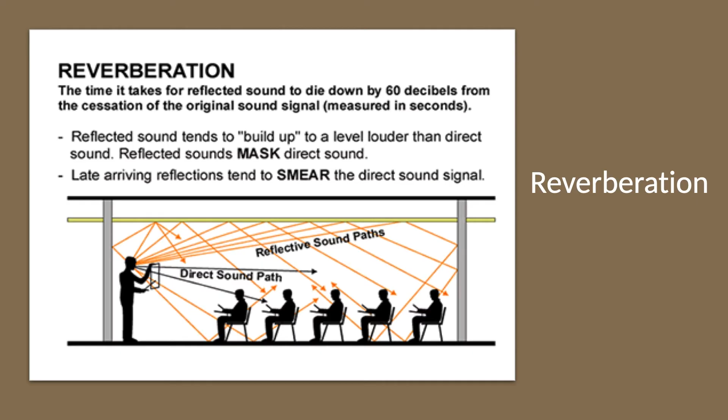Reverberation is the time it takes for reflected sound to die by 60 decibels from the original sound signal. Reflected sound builds up louder than the direct sound and makes it harder to hear. The maximum allowable reverberation time for classrooms is 0.60 seconds.

Ambience or background noise is the totality of all sounds within a room when the room is unoccupied. The lower the ambient noise, the easier it will be to hear the teacher. The maximum allowable background noise for classrooms is separated into 2 parts. The first is noise from exterior sources like highways. The second from interior noises like HVAC equipment and student interactions.

The maximum allowable background noise is 35 decibels for spaces under 20,000 cubic feet. This standard was set by ANSI.

Signal-to-noise ratio is the sound level at the listener's ear above the background noise level. For example, students' main focus is on a signal, the teacher, but during transmission, it gets affected by noise, likely student interactions. This measurement is used to compare the level of sound attributed to the signal to the level of the background noise. The desired outcome is to ensure that the signal of interest, the teacher's voice, is louder than the background noise, pupils in the classroom.

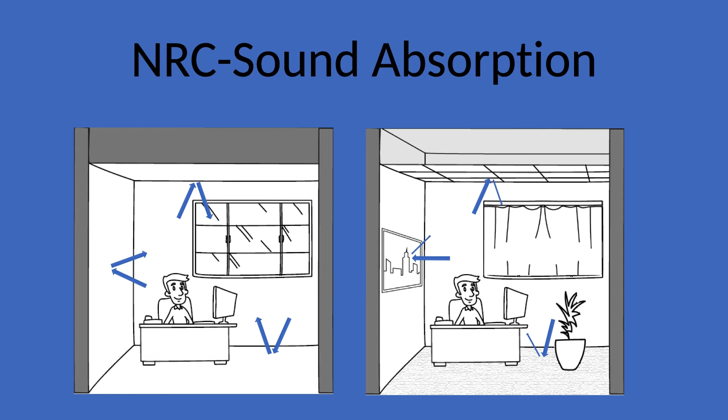NRC is a single-rated system. A material with an NRC of 0 theoretically means that it completely reflects sound. A material with an NRC of 1 will theoretically absorb all sound. An acoustical NRC rating is at least 0.50.

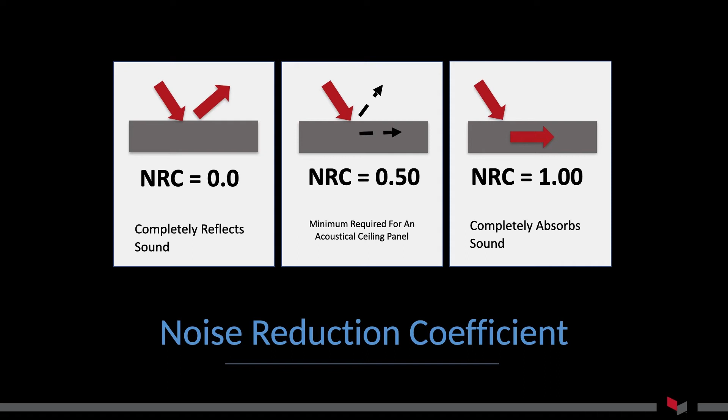What is STC? Sound transmission class is a rating of how well a building's partition blocks airborne sound. Transmission loss is a measurement of the decibel difference on either side of a wall. Let's say we have a 100 decibel tone on one side of the wall, pretty loud. We measure this same tone on the other side of the wall, and we have 55 decibels. So we would say that we have 45 decibel transmission loss.

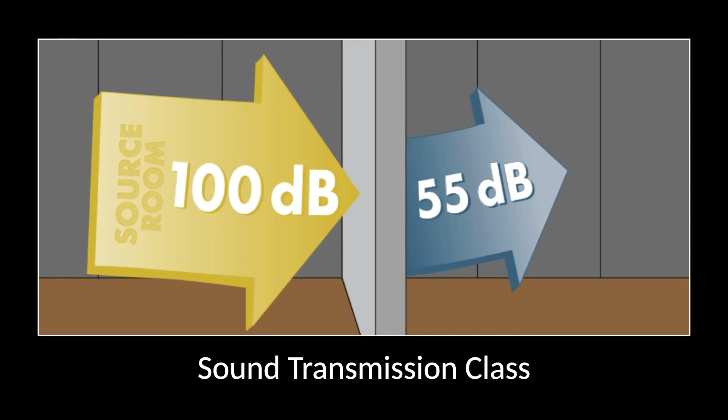Years ago, the walls in our schools were built with concrete block, so sound transfer was not an issue. Today, school walls are constructed with metal studs and drywall. ANSI has set the minimum STC of a wall separating two spaces at 50. Here you can see what can be heard with that 50 specification. Loud sounds are faintly heard.

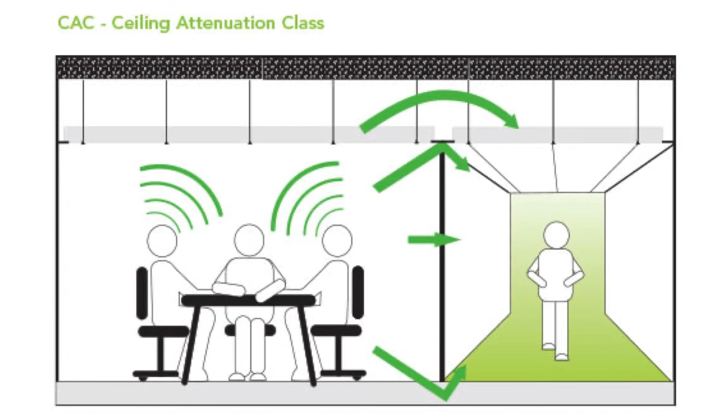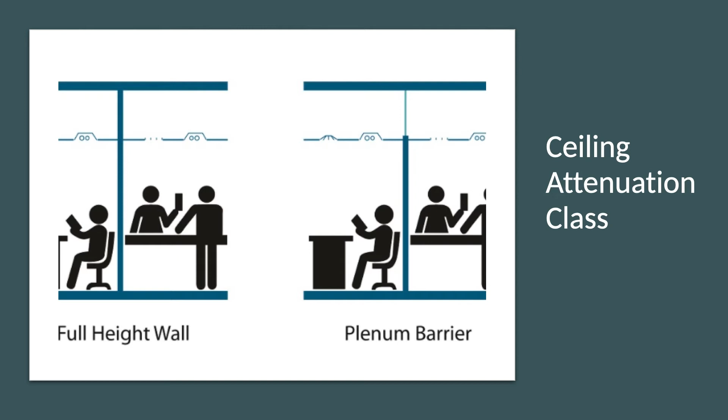CAC, Ceiling Attenuation Class. This test examines a material's ability to block sound. Many walls stop at the suspended ceiling rather than extending to the deck of the floor above. As a result, noise from the adjacent space can move through the ceiling to the adjoining room. To reduce this type of noise, acoustical ceiling tiles will address this situation. High CAC values indicate higher levels of sound insulation between rooms. An acoustical CAC rating is at least 35.

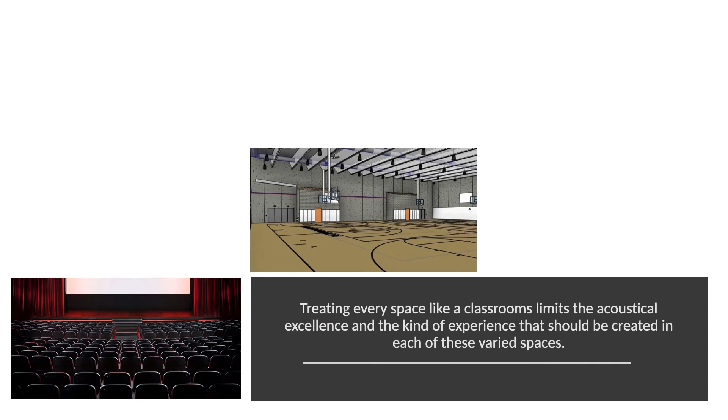School acoustics usually brings to mind the ability or inability of students to understand their teachers inside the classroom. While this is important, schools have a variety of space types and desired acoustical experiences. In addition to the classroom, schools have gyms, auditoriums, cafeterias, media centers, offices, broadcast studios, industrial shops, weight rooms, and band rooms. The list is long. Treating every space like a classroom limits the acoustical excellence and the kind of experience that should be created in each of these varied spaces.

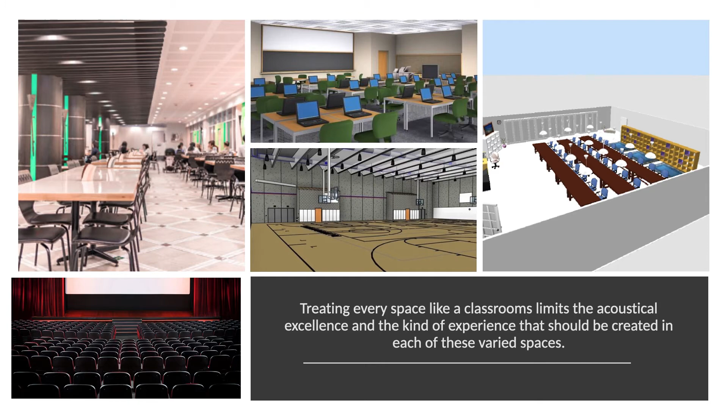There is an intimate relationship between room size, room shape, finishes, acoustics, and core function. An advisable approach is to use the acoustical purpose of a room to drive its aesthetic design. The alternative is to ignore these relationships and then struggle to address acoustics without negatively impacting the visual design intent. The former approach tends to result in a more fluid and linear design process and ultimately a highly successful experience inside the room. The latter tends to result in multiple design iterations, sacrifices, and compromised acoustics. The primary function of the room can be described in three categories: speech, comfort, and music.

Thousands of students on any given day are unable to understand 25 to 30% of what is said in their classroom. Why is that? Excessive noise and reverberation. In the typical classroom, noise levels average about 65 decibels, a threshold for serious health damage with long-term exposure. For students, that leads to lower academic performance, and for teachers, it leads to a loss of voice, having to talk louder to be heard. The health implications are a higher risk of heart attack.

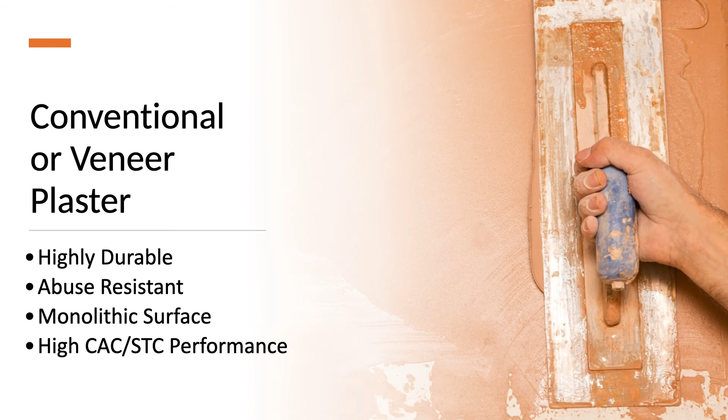Conventional plaster is highly durable and abuse resistant, a monolithic surface, high CAC and STC performance. Drywall: high CAC, low NRC, naturally fire resistant, sustainable, and there are abuse and impact resistant options.

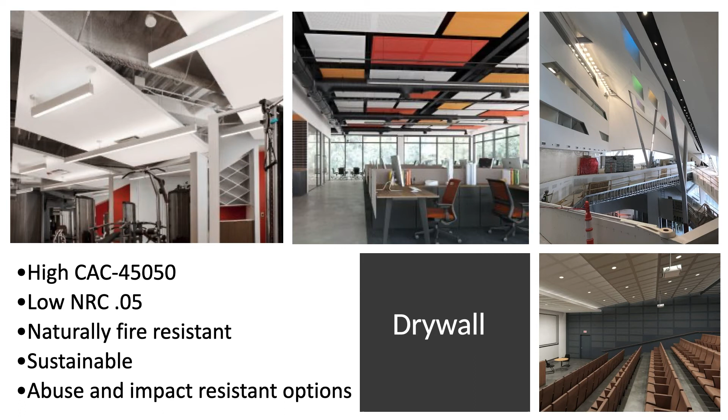Monolithic acoustical drywall: high NRC and CAC, aesthetics with no exposed grid, unlimited shapes and sizes, similar installation as drywall, economical sound control.

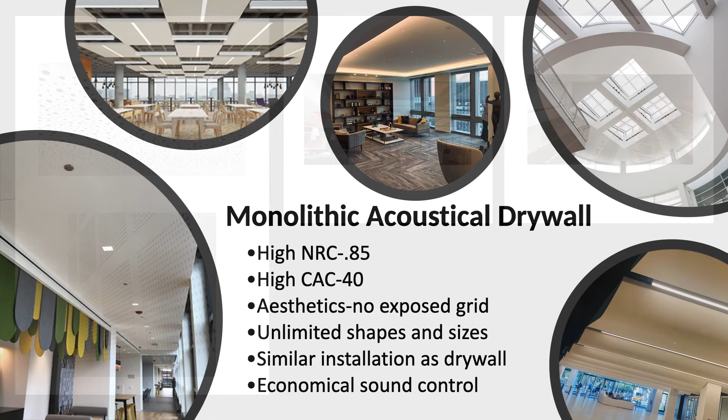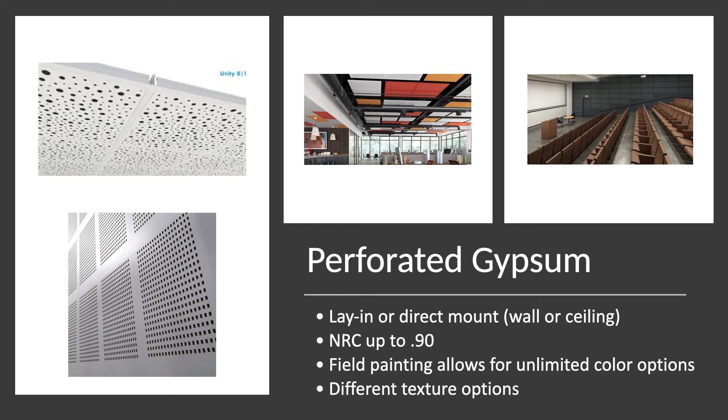Perforated gypsum: lay-in or direct mount, high NRC, field painting allows for unlimited color options and different texture options. Glass fiber: high sound absorption, larger plank sizes, fine texture, washable and scrubbable surface, warranted against sag, mold, and mildew.

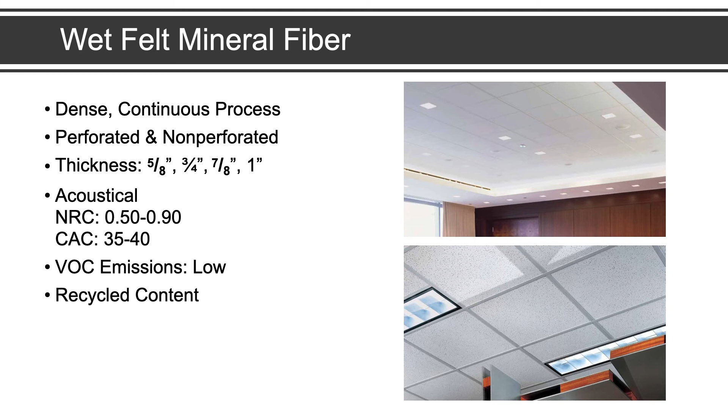Wet felted mineral fiber: dense, continuous process, mechanical perforations, a thickness of 5/8, 3/4, and 7/8, acoustical, VOC emissions are low, recycled content, economical, low maintenance, and fire performance.

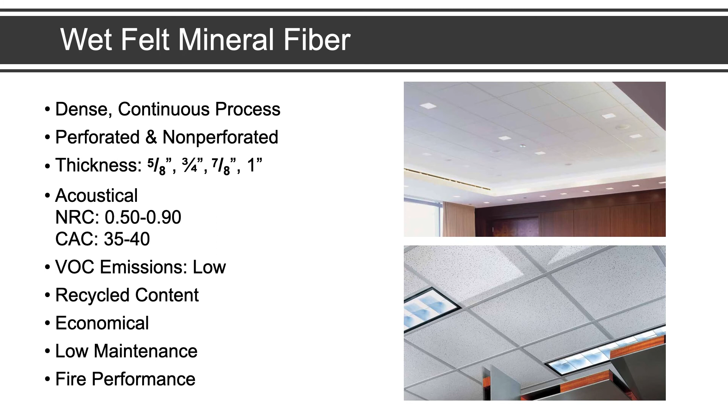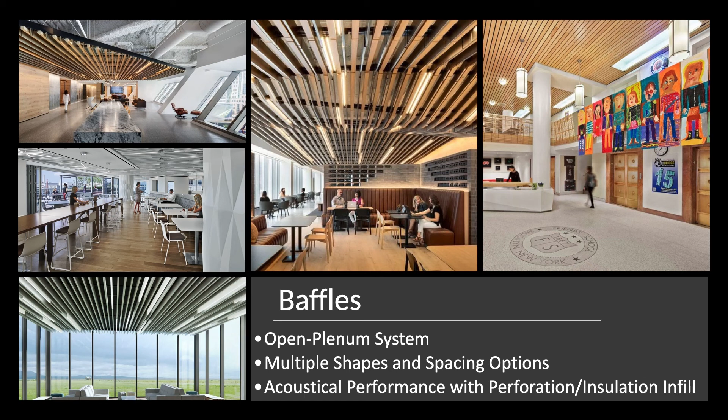Cast panels: abuse resistant, acoustical, VOC emissions, fire performance, recycled content, higher cost, low maintenance. Metal baffle: open plenum system, multiple shapes and spacing options, good acoustical performance with perforation insulation infill.

Decorative clouds: metal or ACT, multiple shapes and configurations with an open plenum. It can be suspended below other ceilings. Wood can be lay-in, linear, or grills. It has the look of natural wood. Acoustical options are available. It's a higher cost product.

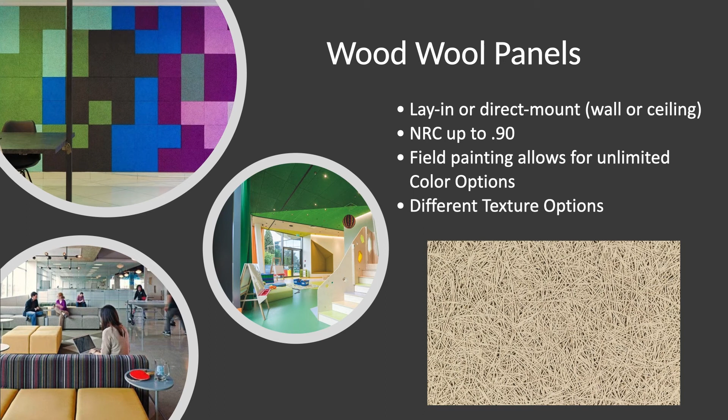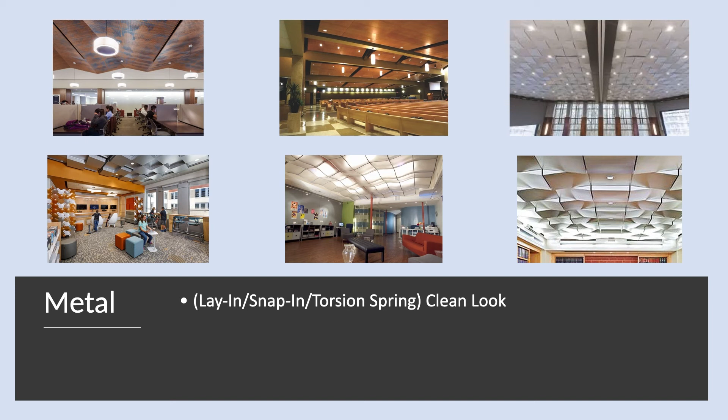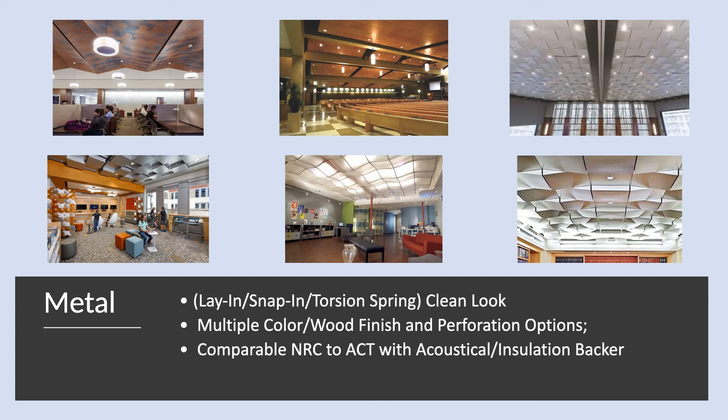Wood wool panels: lay-in or direct mount, wall or ceiling, high NRC. Field painting allows for unlimited color options. Different texture options are also available. Metal: lay-in, snap-in, torsion spring. Clean look, multiple colors, wood finish options, and perforation options. It is a comparable NRC to ACT with acoustical insulation backer. It's a higher cost product.

The COVID classroom. How has COVID affected how we specify material? In an effort to control the virus, the addition of plexiglass is common. This means there are more hard surfaces in the room, leading to an elevated echoing and reverberant space. State-of-the-art air purification systems promote a healthier environment. This means that there will be additional mechanicals in the space above the ceiling, contributing to the noise level in the space.

With a mandate to social distance, classrooms in the future will likely incorporate design changes like wider walkways and larger classrooms. There will be a particular emphasis on materials that can be effectively cleaned. Education design must consider incorporating materials that stand up to the cleaning that is now a mainstay. It is not unlikely that educational facilities could make a healthcare tile a mainstay specification.